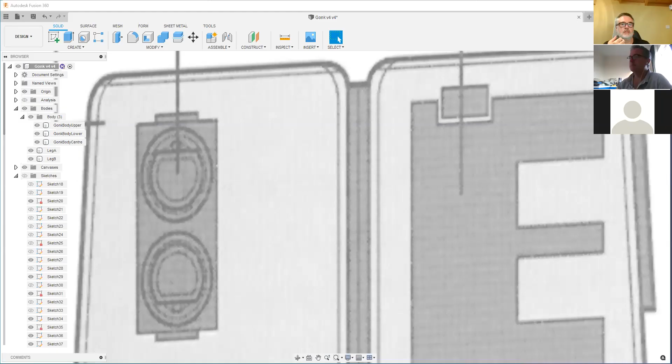Okay. Before we get started, were there any questions from the last couple of sessions, or has anybody had a go at modeling some of this or any other models? So.

Hey, Michael. Yeah. The right side of the Gonk, that area that has all the greeblies and everything. Yeah. I actually modeled that as one piece and just inserted it into the Gonk instead of it being in pieces. I just did one big piece and just slid it in. Okay. Yeah, it worked out okay. I'm just trying to do different things as I learn, but it seemed like it worked out okay.

Is that the piece on the right hand side? This kind of detail here. No, the right hand Gonk, the one facing this one. Yeah, that whole circle area. Yeah. Right. So you just did that as one big insert. Yeah, and then I just slid it in and out. I don't have it up right now. Something's wrong with my Fusion, but it seemed like it worked okay.

Yeah, to be honest, it's probably something I'd do, because it's ideal if it's printed flat, isn't it? You've not got to compromise as much trying to put angles in to get overhangs and whatever. Right. Yeah. And I'm going to put magnets around the outer shell, so I'm going to put some lights and things behind it. So I have it as one piece, and then if I want to get inside of it, I can just pull it out and do whatever. No, perfect. Cool.

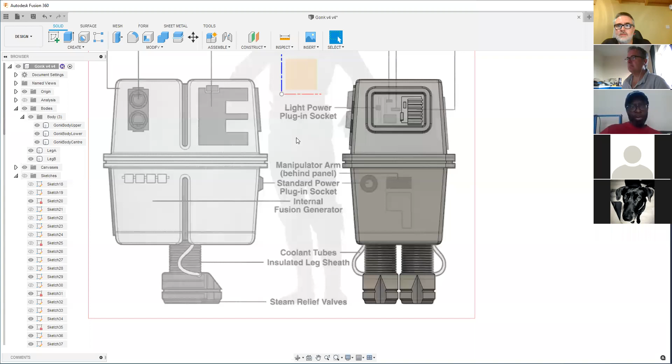Anybody struggle with anything on the modeling so far? Does it all make sense and is it all working? No. No, all good. I'll take that as very positive then, to be honest.

Cool. Okay, so what I have done just in the last half an hour or so is I've added this greeble at the front. I wasn't going to step through how we did that. It was pretty much the same as we've done already, which is using pulls and extrudes, etc. So effectively, again, we talked about sketching on different surfaces. You can sketch on this surface here, you can pull it up so that it lines up, and then you can start to draw some of these different greebles and different shapes, and then really just use either the extrude or the pull to continue to add details.

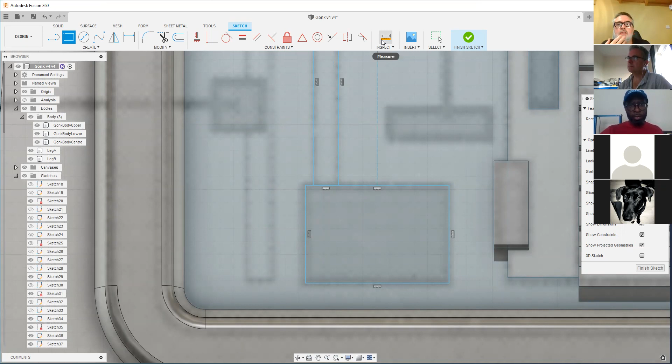I'll just go through some 3D printing stuff, to be honest. One thing to watch is first of all the size of some of the details on here, bearing in mind that depending on the scale that you're printing it on, you're going to be printing on a 0.4 nozzle. So I find the inspect button really useful, because you tend to lose scale anyway when you're zooming in and out; everything looks a lot bigger than it actually is. So you can measure between two lines there. I can see that's 1.93 millimeters, for example. On the 0.4 nozzle, that would be fine. But if you're getting down to 0.1 and 0.2 millimeter details, you will lose them.

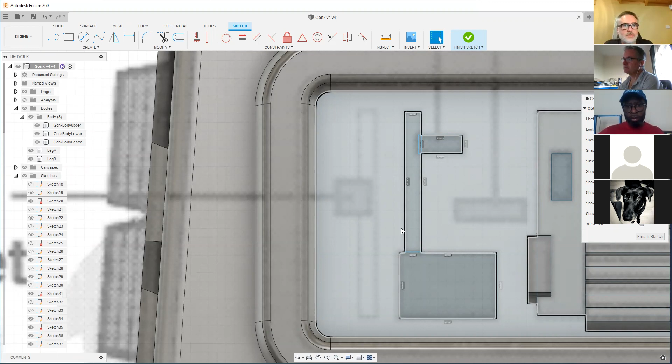I tend to find with things like the body panels on R2, where I'm putting lines in there, I'll go down to probably about 0.6 millimeter to make the details around the panels. I won't go much below 0.6, because otherwise you just lose the detail when you start to print it. And as soon as you start to paint it, it just kind of fills in. So it's really not worth going down to that sort of level.

The other thing that I tend to do, and again, this is more direct modeling, is I just tidy the sketches up. I literally just delete all the sketches, like I've just done there. I'll delete the actual construction planes, just so that all I'm really left with is the bodies, and it just makes life a little bit easier. I've not got a huge list of things on here. Obviously, if you're not doing direct modeling, if you're using the timeline, you can't do that because everything's linked. Whereas with direct modeling, as I said a few times, it's a bit like wood, to be honest. You can just go back and change and cut bits and then rejoin bits.

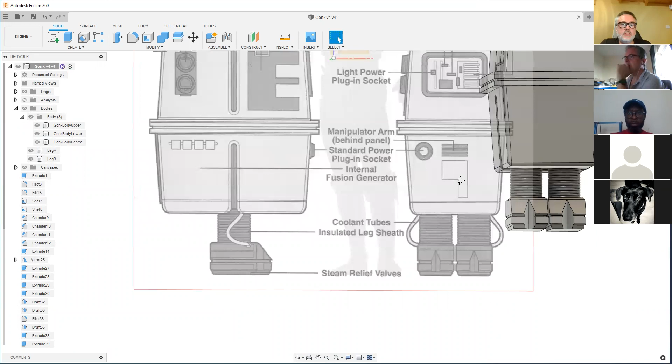Right. So one of the things I was going to cover, I covered this very slightly last week, is how you do these tubes, cables or whatever. So I did a lot of these on Chopper's legs as well. I think I did cover it, but let me just bring my origin back.

So the way that you do these is something called sweep, and sweep again is a really useful tool. If you just go to the front, what sweep requires is 2 sketches along 2 different planes. I'll just show you in simple terms what that does.

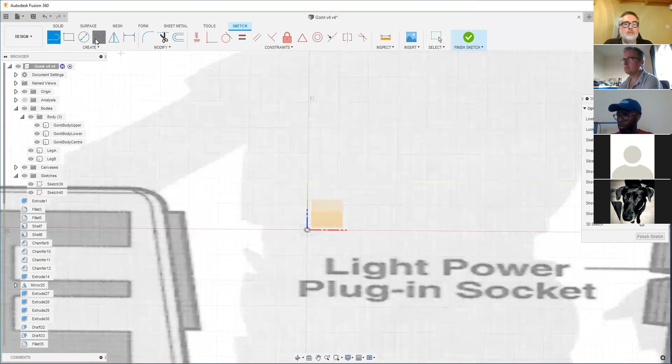So that's the shape of my cable, wire, or whatever I want to sweep. So I finish sketch, and then what I'm going to do is define the path that sketch goes. I'm going to choose a plane that's 90 degrees to that, and use a spline because that gives me a nice smooth curve, and just draw a little bit of a cable like that, and tick.

As we said last time, you can get the cable moving on a spline, but it's still really in 2 dimensions. So if you look at it directly from the side, it's still flat.

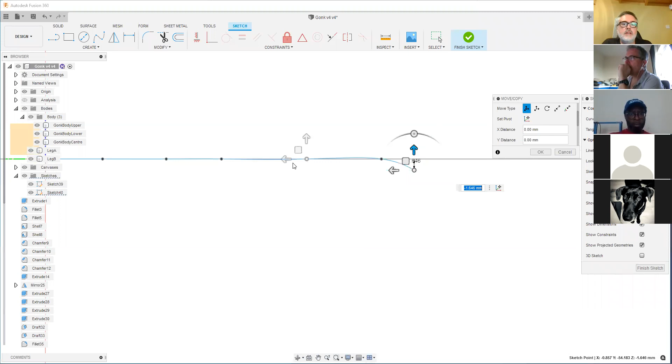Now what you can do then is go in and edit the individual points. I just want to refresh on this here. So I can then look at it on the flat line and pull that down a little bit, click on that and pull that up a little bit, click on that and pull that down a little bit. So what I'm starting to get now is this shape in sort of 3D space.

So if I look at it from the side, that's what it's like. If I look at it from the front now, you can kind of see that it's got this loop thing going on. So you always draw it in 2D flat space, and then you move that. So what I've got now is a profile here, and a path which is going to follow the profile, and the two do need to intersect.

And then finish sketch, and this is where you do the sweep. You highlight that profile, you click on the path, click on there, and what it then does is it will actually do your cable like that. So sweep, I find sweep really useful for doing that.

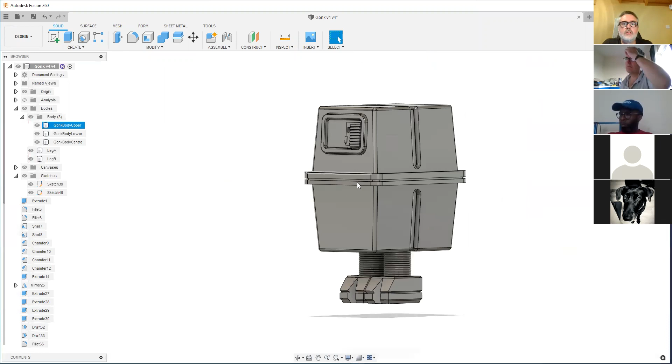The other thing I do use sweep for sometimes is for adding overhangs after I've made a complex body, particularly on curves. I can show you what I mean on here. So if I was printing this straight up, I've got a 90-degree overhang here, which would create a bit of a problem. So what I'll often do is create a mid-plane, say between there and there.

Click OK. Then what I'll do is draw on that mid-plane. It'll all become apparent in a minute. Sketch - and for reference, I'll reference that line and that line, the ones that I want to create a little bit more of an overhang. Rather than being 90 degrees, I might just pull that down, so that's 180 to 160, which is a 20-degree overhang, which is, as I said before, probably the sharpest that I would actually go.

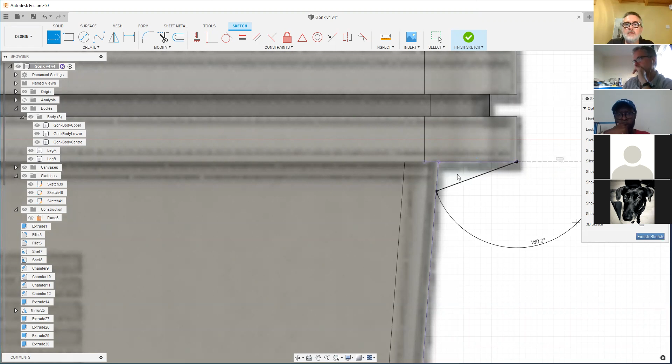So what I've done now is created a profile - let's have a look, so you can see the profile I've created. I want to add that now, so what I can use is create sweep, select that profile, and then the path I can select as being the outside edge. I don't know if you can see it, but it's in red at the moment. What it's now done is added that all the way around the outside of that edge.

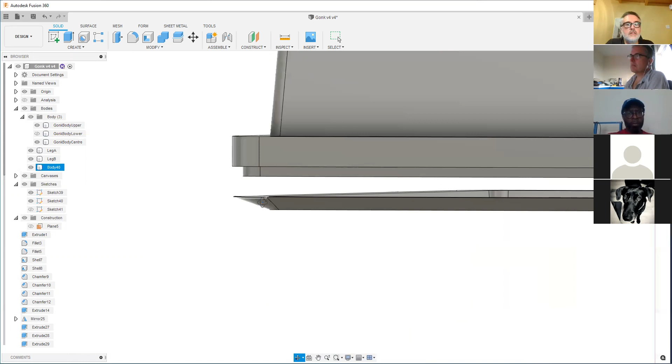So very quickly, if I click on join, what that's done now is given me a continuous loop. In fact, I've selected new body and I'll show you - if I hide that lower, it's created the overhang for me based on that profile. So again, really quite useful for when you're designing and thinking about overhangs - you can use a sweep to wrap around, and then all you've got to do is modify, combine the main body with that, and it becomes part of the plastic.

So when you're then printing, if I was printing this straight up, what I'd have is that overhang built into it. So again, I think as you start to go through all the different tools, it's just playing with them and looking at what you can use them for and when it's appropriate.

So I'll just undo that to get back to... oh, look at you.

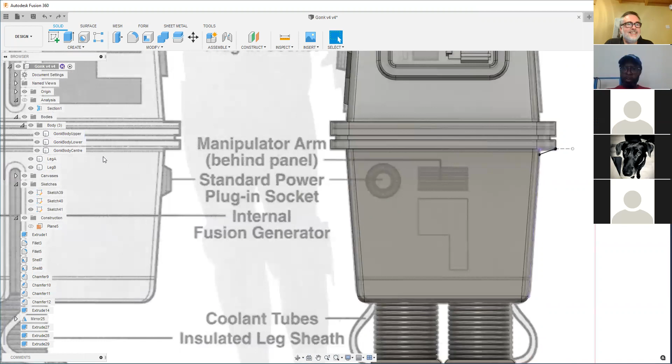So after being like, oh, I'm available both days, now they're like, okay good, what about tomorrow? Hang on a sec, I think. So, fold these up, I'm just gonna... oh, there we go, sorry.

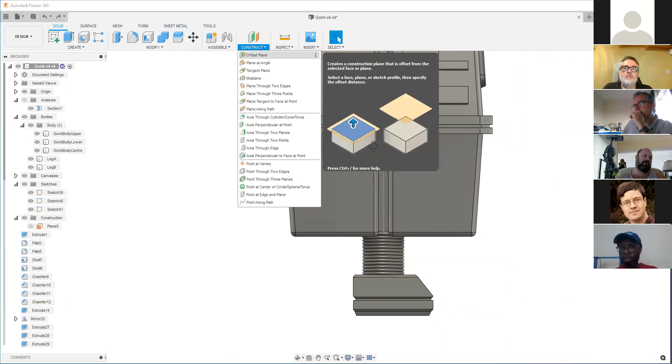Actually, what we'll do first of all, as I said, when you first create planes they're not always as long as you want, so you can grab hold of any of the edges and pull them out.

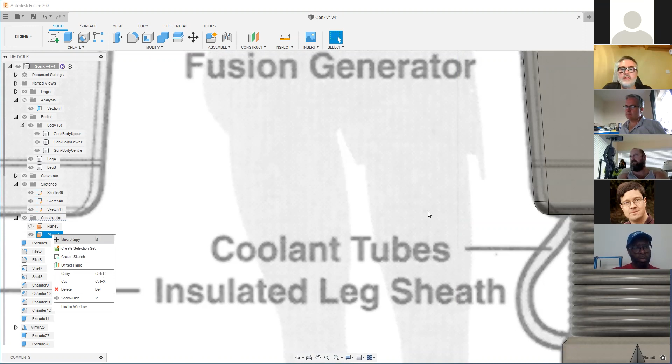But I want to, if you look at it from the front, I want to start sketching about there. So what I'm going to do now is that plane I've just created, right click on that and click on move. I can now shift that plane in again to exactly where I want it to be. So I'll pop it into about there, like that. And then that lets me sketch that first part of that pipe in the right place.

So I'm going to go into sketch mode on that. Now I'm on that plane again, and I'll use Spline, and just see if I can roughly get where I want. Something like that.

And the other thing with Spline is, I think I mentioned this last time, you don't have to get it right first time, because once you've done your spline, you can go in and start to drag some of the points around.

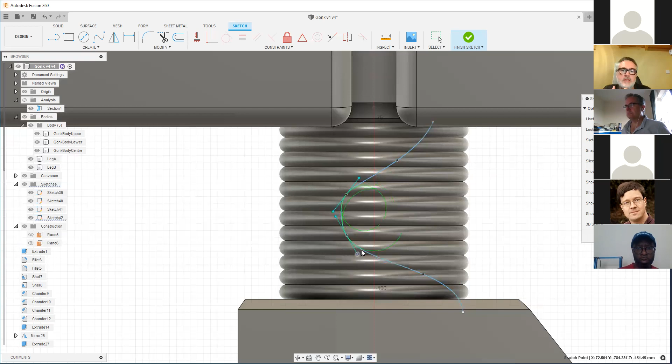So I can reduce that little bit of that kink on there if I wanted to. If I click on any of the points, I can adjust the acceleration of the actual curve, so I can get it just around about where I want it to be. Just pull that out a little bit like that, there we go. So yeah, I'm happy with that.

And then again, if I look at it from the front, I can see that I'm going to drag, let's move these points yet again. So... whoops, what's happened there? I've obviously dragged that right down to there. So let me just undo, get back to how we were.

Right, so what I'm going to do now is right click, move, and I'm just going to move these points. When you first start moving these points it looks like it's going to make a right mess, but if you just pull them across, there we go, start to get it to follow that pipe there.

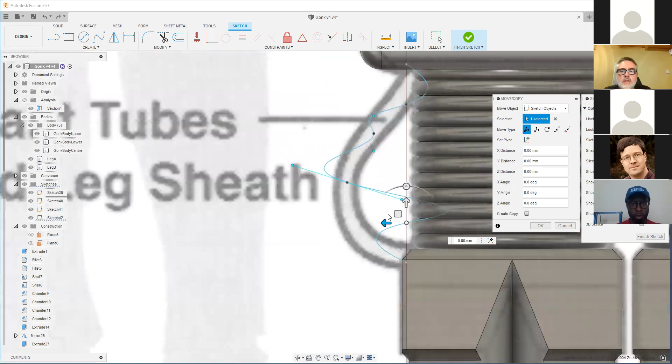Why is that doing that now? It didn't exactly go to plan. Let me try again. Move. So let's...

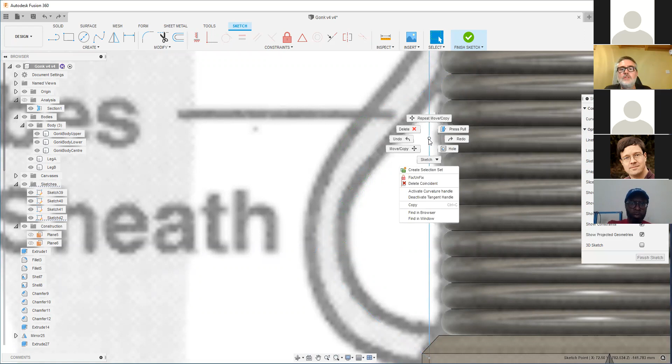Drag these points out to there. Drag that point out to there. Get that point out to there. Might just... okay, and then drag that point out to there. Escape. Oh, don't hit escape, I hit escape then. Sorry about that, I'm just going again. There. There. And there.

Okay, and then what I'll do is I'll just grab these, just smooth out the angles a little bit then.

Move that one to the... move that to the. There we go, that will do. Okay.

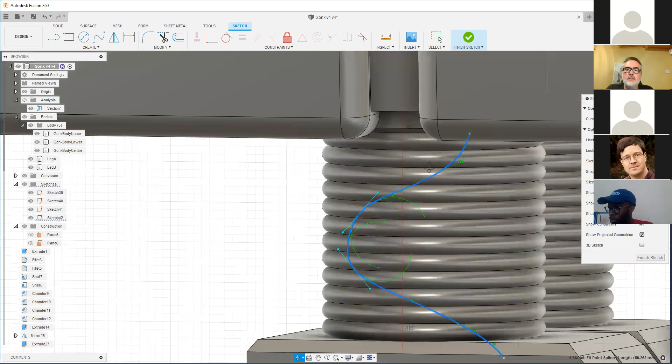So what I've got now is a path that's following it from that side, and then I've also got the same angle, so it's roughly the sort of size and pipe that I want. And then if I look from the bottom, what I'll do is I'll just sketch the profile of the pipe on that starting point there.

So the profile is just going to be a circle, I'll make it about that big. Finish sketch, and... oops, I missed that. I'll just right click on that and move it so I can move it back to, so it's got to intersect where that sweep is.

Okay, highlight that, and then I'll do a create sweep and select that as a pathway, and put that as a new body. And then what I've done there is I've actually created the pipe that's roughly the same as the one that you can see on there.

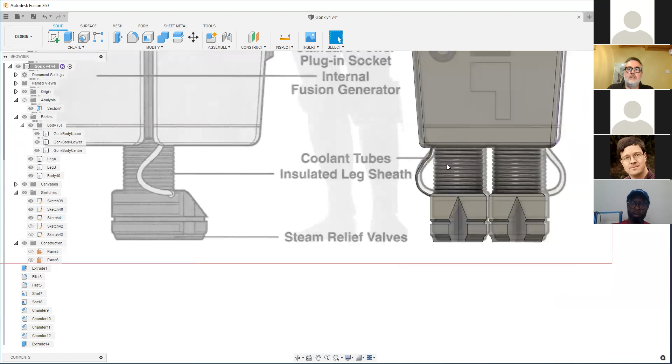Now, as you can see, it's considerably thinner than I want it to be. I'll just see if I can press and pull this one to make it a little bit thicker. No, it won't let me pull that.

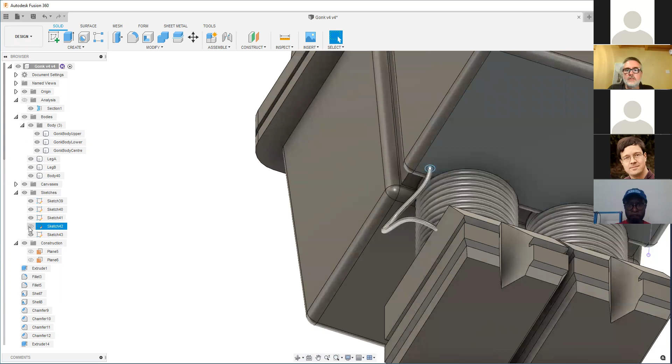So let's try and make a slightly bigger circle. But hopefully you kind of see. And all I'm going to do is delete that body, delete that center circle, and then I'm just going to recreate it really.

So create sweep, and select that as a pathway. There we go, and a new body. Make it a little bit thicker. There we go.

So that's your pipe, and then obviously you just repeat that on the other side. Delete my sketches as we tidy up, and effectively that goes in. I think we'll mention, like last time as well, that this is about 1.7, 2 millimeters thick, so you could actually just use filament for this one and drill a couple of holes in there. So both kind of works.

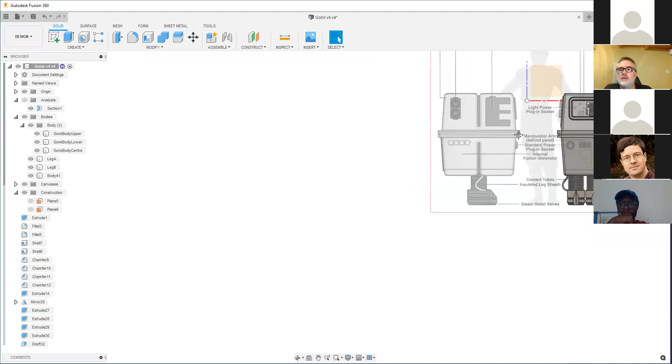But yeah, so that's the sweep command. And then, to be honest, the rest of the details on the Gonk is just a matter of continuing to model - drawing the squares, drawing the circles, pulling, extruding. And it's more about being creative in the way, like we did last time, about actually getting everything ready for printing, making sure you've got overhangs that will print, etc., etc. So again, I will just stop there.

Any questions, thoughts, observations, or anything you'd want me to go over? Are we all okay so far? Yeah, one, Michael - yeah, go for it.

Yeah, so kind of what you were just coming up there was something I had run into a few times now, where you've got a body and you wish it was a little bit larger or in a different position. And in general, I've had to kind of start over instead of being able to adjust the profile or slide it. And kind of the same with holes - like I've placed holes, but then decided I want to, or a body to extrude part of it, and then I want to move that later. Is there a way to do that once the bodies are created and you've lost the sketches and stuff?

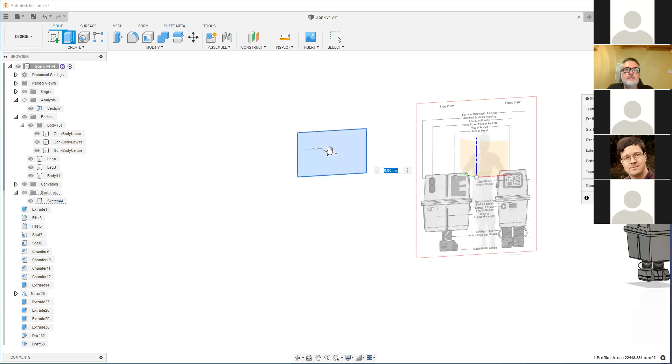There is, yeah. So I'll just do something quickly - I'll just model a block to play with. Yeah, so start with holes. So if I was to create a hole in here, which is that big, right the way through there - so I'm just going to cut a hole.

So the first thing with holes is holes can be moved around in the same way as bodies can be moved. So if you right click on a hole, once you've got it selected, you can actually move that hole around. So you can shift the hole to wherever you need to.

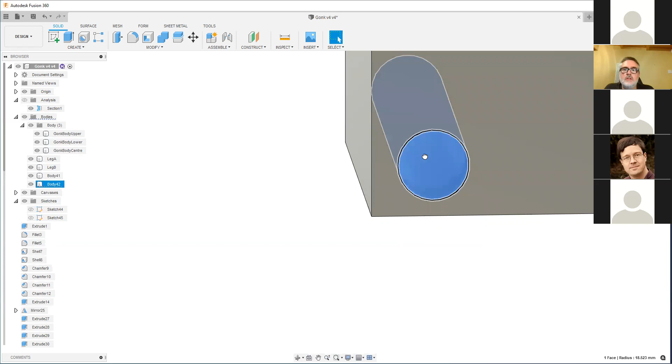If you want the hole to be smaller and larger, you can press pull to reduce the size of the hole or to increase the size of the hole. And likewise, I tend to use things like press pull all the time, really just to adjust the size and various dimensions on it.

Now, it works very well when you're just doing it with squares, but then when you start to introduce more complex models, like you've got fillets on there and things like that, it can operate slightly differently. So this is working okay. If I try and press and pull the fillet, you can see what happens then is it does the best that it can do to adjust the model that you're actually wanting to, in whichever direction you want to do it.

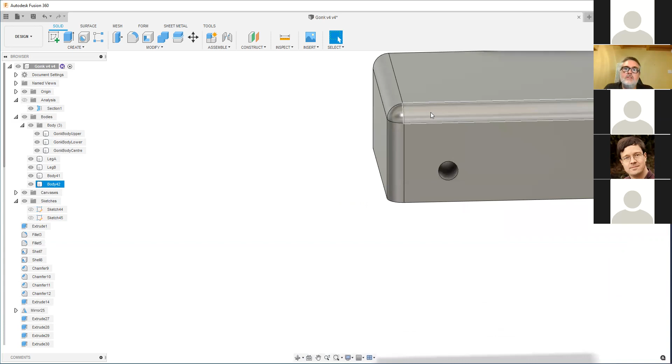But the more complex the model, the more things start to be interlinked, even in direct mode. So like I said, if I'm trying to alter that curve, you can see it alters all of them. But most things can be moved around. You can see I've just put a fillet on that, so what it's done is it's done the rounded bit on that corner. So the more you add to the model, the less flexibility you've got when you start to pull. But generally, you can push and pull most parts around.

Have you got any specifics that you wanted to? I don't know if what I've just gone through there was useful, or whether you'd hit other challenges that you couldn't do things with.

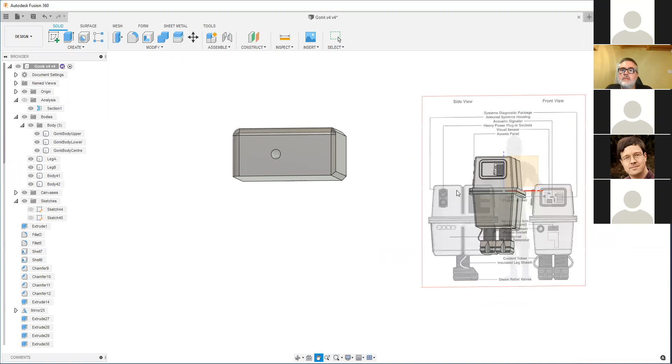It's definitely helpful on the holes. I guess if you want to go back to the Gonk for a second, I could see if I have a better example. So like if we look at the body that you've got there for the greeblies on the tray, if that's already, is any of that recessed? I guess like if there was a piece that was recessed and you wanted to move that, but you had already extruded it into the other body, I guess. So something other than a hole.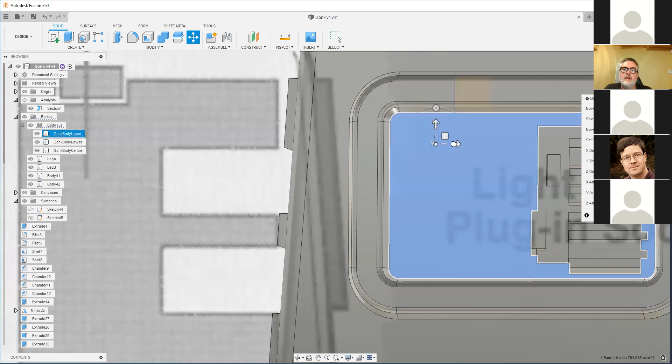So yeah, if you pull in, you can pull it in and out. Do you mean actually physically move the recess? Yes. Right, so if I hit move on there, that's where it won't let me move the recess. Is that what you mean?

Yeah, so in that case, a couple of things you can do is you can press the shift key and select more elements around. Because what it's trying to do is move just that back plate with it, but it realizes that it's got all of the recess planes and the fillet planes and all of that kind of stuff. So sometimes if you press shift key and select more of it like that, and try moving, it can do it. Let's try to see what happens. Yeah, so there you go. Okay, cool, thank you. Yeah, so that's one thing.

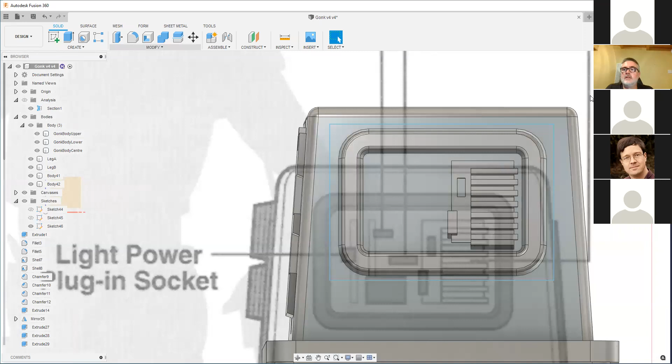What the other thing that I'll do sometimes is if it won't move at all, I'll literally drop a square around it, do a modify split body, cut that out, and then just move that whole piece to where I want it to be. So I can pull that down to there, for example. And then what I'll do is just pull that top bit so it just overlaps again. And if I hide that piece I've just cut out, I can then pull that bottom piece. It's a bit of a workaround, to be honest, but you can do something like that and then modify and combine them back again. So in that case, you're kind of sliding it around, making holes and then filling them and matching things back up.

Yeah, so okay, all that if you've got something with a load of complexity and detail, all you've got to watch out for is that on the inside you've got enough room to play with it, so you don't end up hitting a corner or something like that. But I'll just step through that again.

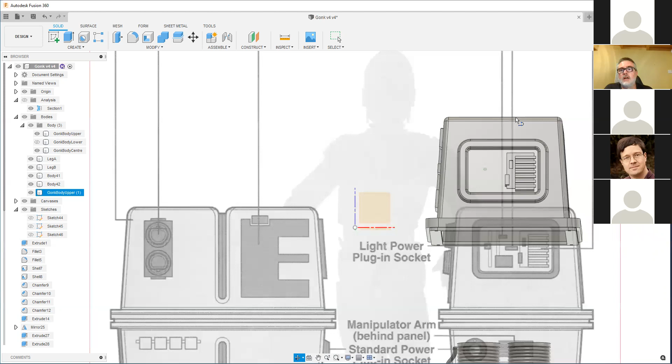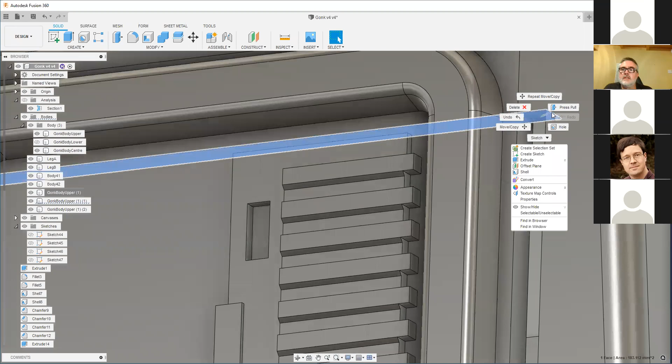So what I did is I went into sketch mode on that plane that it's on. I drew a square around it, so it's fairly close all the way around like that. And I'm using that square to cut out the piece I want to move. So modify split body, highlight that middle section like that, click OK. And now that's obviously a cut out separate piece. And then I can move that wherever I want to move it. So I can move it up a little bit and across a little bit like that. And then when I've done it, all I'm doing is using the pull command on these inner faces here, which is the old hole, just so that everything connects back up again. That makes sense.

Just pull. So it just saves you having to sort of recreate the whole thing again, and then modify and combine this and this again. Is that helpful? Yeah, thank you very much. Cool.

Good. And hey, Michael, a couple of quick questions. Yep. So your primary use of planes is to be able to sketch in space. Is that how I'm understanding it? Yes. Yeah. You can use planes. Well, you can actually use them for quite a few different other things, but that's what I've been using them for so far. Yeah. Okay.

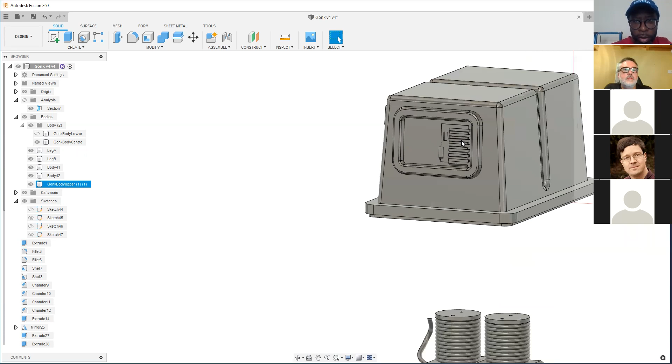And the second one is for when you had the 90-degree overhang on that edge, when you fixed it, is that going to be a part of the print? That could be removed later, or is it going to be permanent? The one that I did underneath here. Yeah. Is that going to be a permanent part of the print, or something that's removable? It's permanent. If you do a body combine, it's a permanent part of the print. So if I do modify combine, it's taking that piece that I had around there and combining it with this body to make it actually part of that whole body. Okay. So it is a permanent part.

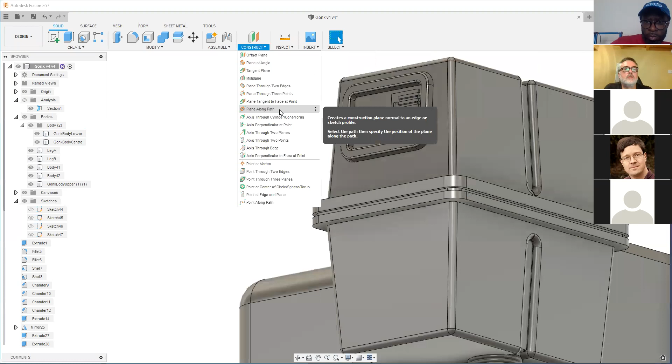Are the little triangle supports on R2 an object that you created in Fusion and then duplicated around, or is that a feature of Fusion somewhere? The ones you can snip off. Effectively I've created those. So again, I'll just quickly show you. So if I do mid plane, I'm just getting a mid plane to give me something to sketch onto. I'll show you how we did those.

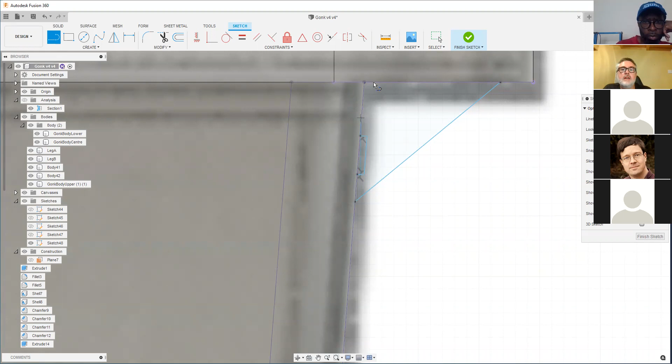So you pull that like that, and then I'm into sketch mode onto there now. So we're just going to project. Project, there we go. I'll just project that and that. So they were the little plates that went something like this, and then I did a couple of little cutouts so they weren't stuck directly to the plastic, so they've got a bit of a latch, and then I put a little bit of a gap at the top. I think it was 0.4 mil at the top, which was a gap for it, and then that gives me one.

So I might make that 0.8 mil wide. It's a new body. So I've modeled something like this. And then what I would use is create pattern. I'm going to create a rectangular pattern, and I'm going to use the very edge there as the guide. So as you can see, that's moving. If I wanted to click it onto symmetry, I'll move it to there. And then I can choose how many of those I want, 4, 5, 6, 7, 8, 9, like that. That's awesome. Thank you.

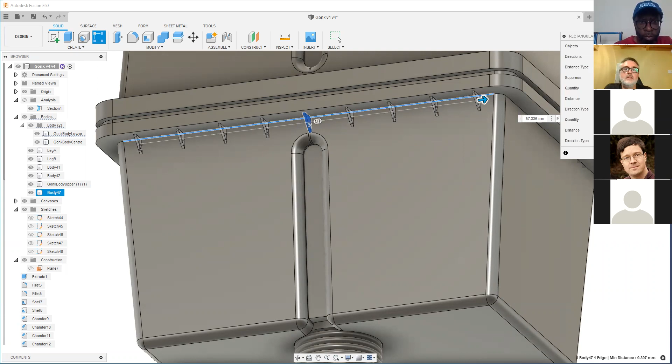Andrew, does this help with what I feel like your question was getting at too? Yeah, exactly. That's what I was trying to figure out, because I want it to be removable where I can still have the 90 degree, but just for printing purposes, have it there. Got it. That's good. Thank you.

And tolerance is, if you use a slicer to generate supports, it will create an empty gap between the layer and the support, but that empty gap is dependent on the layer height that you're printing on. So if you're printing at 0.2, it'll typically create a 0.4 gap. But if you're printing at 0.3, it might give you 0.6. So it's got a couple of layers where you're not printing, which gives the plastic enough time to cool, so it's not going to stick to the next layer.

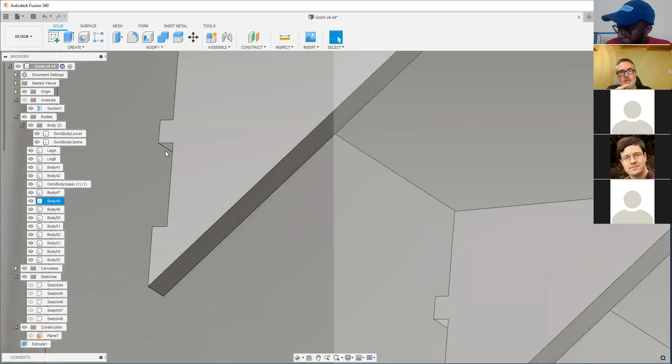So if you're doing these, what I tend to do is use a 0.4 gap. With built-in supports, I'll tend to use a 0.2 layer height as a start, and do a 0.4 gap. It's a little bit of trial and error, but when you're doing these little tabs that are sticking into the body, you want them to be big enough to hold, but small enough so that you can cut them out with little clippers. So you can play around with those a little bit.

So the widths are closer to allow for better bridging. Is that right? Especially when you're coming across. Yes. Yeah, gotcha. Okay. Yeah, you want your width to try and give that.

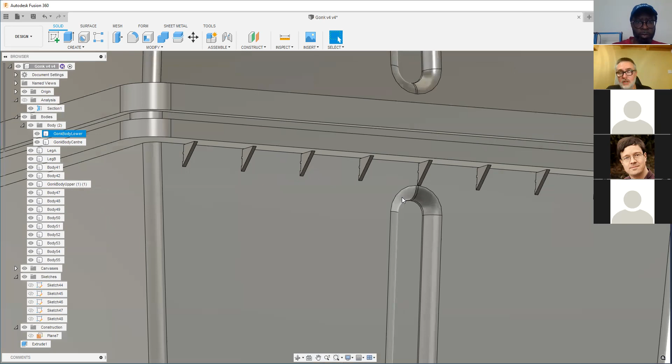The closer you are, the less you're going to get sags in between each one. Right, thanks. And a lot of it's trial and error to see what works on the particular model that you're printing. But as we've seen on some of the R2 ones, these are quite easy to cut off with a pair of those little side snippers anyway. Right, thank you.

So yeah, the pattern command is really quite useful. The other one you can use is pattern on a path. Whereas before we just did it in a rectangular shape, if you click pattern on a path, it'll allow you to do a bit more of a complex path. So as you can see there, there we go. This one's now allowing me to go around the corner as well.

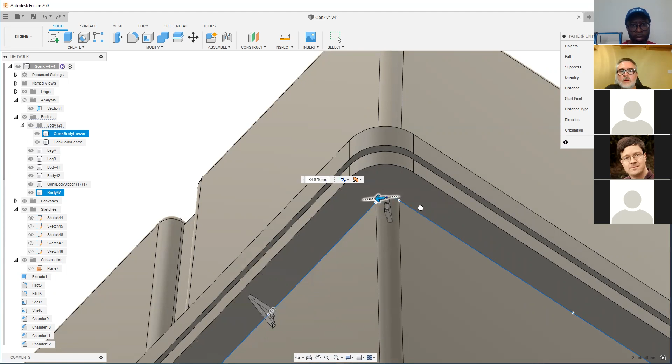With those patterns, if you modify the original object, will it update the rest of them? Not in direct model, no, it won't. Okay, so you mean if I was to put those supports in like that, click OK, and then pull this face out? No, I mean if, let's say, you wanted the triangle to be slightly taller, could you update one of them and it would replicate the rest within that pattern? Or if you put a hole in the middle, does it copy it to the others, or are those each their own item now?

Yeah, you can see as I'm pulling one, the other two are pulling. Can you see that? I think I'm getting lag, but I believe you. Oh, there it is. Okay, cool. Yeah, when you mirror an object or you create a pattern of an object, it tends to link the objects.

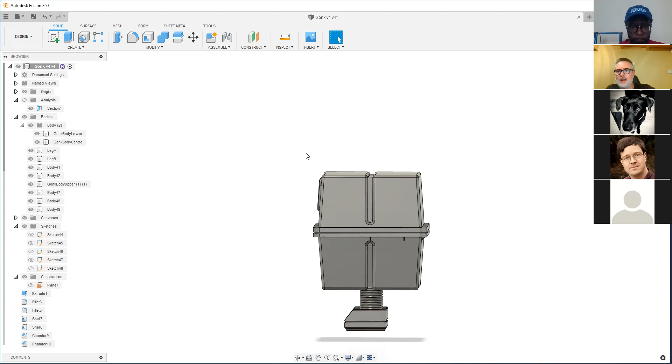I've been caught out with that, to be honest. On R2's booster covers, the details at the side, I've pulled one side back by 37 mil for the long and short legs, and then gone to the mirrored one and pulled that back 37 mil. What I've actually done is pulled it back 74 millimeters, because if you do it on one mirror, it actually affects the other one. Does that make sense? Yeah, absolutely, that answers the question for sure.

Thank you. So you've just got to keep an eye on the models as you're making changes, particularly where you've got patterns or mirrors, because it can affect more than one. The other thing to watch is making sure that you combine all the pieces you want to combine before you export your STL. At the moment, the body's not got those supports combined to it, so I'd have to use modify, combine to connect them together. So I'll just delete those.

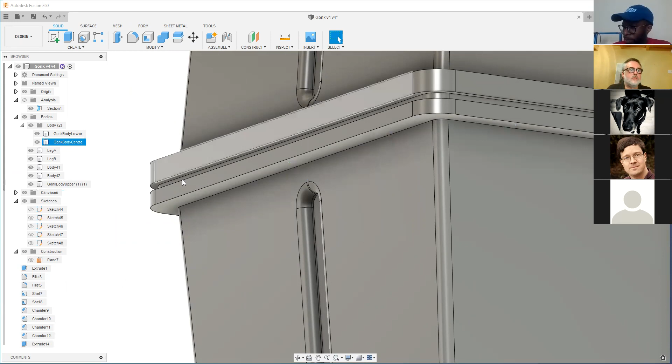I'm not going to go through modeling all of these because we're using a lot of similar ones. Once you've got the body ready, right click and save as mesh, which exports it ready for STLs. I don't know if I mentioned this last time, but in the last update Fusion 360 made the default format 3MF, which is a more sophisticated mesh model, and a lot of slicers will happily load a 3MF as much as an STL. But for maximum compatibility, you need to drop down and reselect STL. It's just a gotcha to watch out for.

I was having a read through, and 3MF has a few extra features. It holds the scale a little better than STL. STL is quite an old-fashioned one, but it works for what we do. You've also got refinement, so high, medium, and low on STLs. When you're exporting for print, that's the number of polygons, or triangles, that's actually on that model.

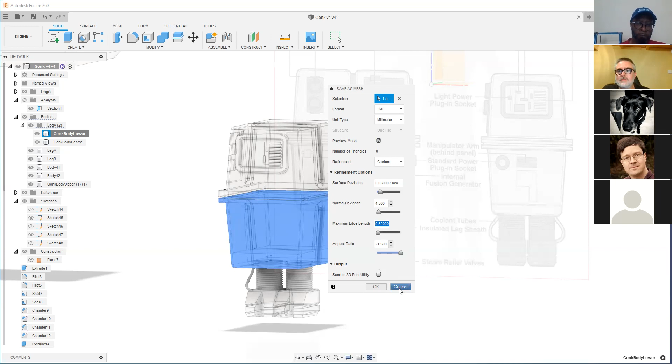And of course, then people were struggling a little bit when they loaded them into slicers, so they'd end up just toning that down a little bit. But you've got quite a bit of control on there to play with it. And then I think we covered this last time as well, but obviously you've got the file save, which saves to the cloud. So Fusion is a cloud-based system, but you've also got the export, and export lets you save all of these files to a local file in the .f3d format, which is Fusion format. So if you don't necessarily trust the cloud, or you're worried about losing files, you can also save these things locally.

Okay, and that was pretty much it, I think, to cover on the Gonk. Anything you want me to cover specifically, or anything that you want to dig into?

More questions? Hey, Michael, one more for you, and then I think I'm okay. Yeah, go for it. In the beginning, you mentioned the detail on the greeblies. You said if you had fine lines, you would use like a 0.6 millimeter for detail. Is that something that you set in Fusion? Where would you do that? How would you work that out?

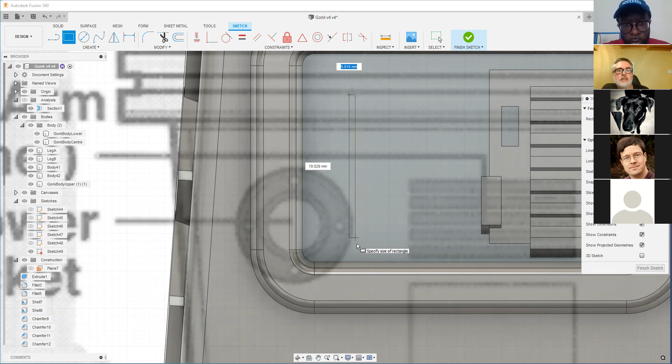No, what I was referring to is if I was to create a line, sort of like a thin line that detailed the panel. So if I put 0.6 on there, you can see that's 0.6 millimeters wide, that block that I've created. And then if I click on finish on that, and then I right click, press pull, minus 0.6. So what I've created there is a little groove that is 0.6 deep.

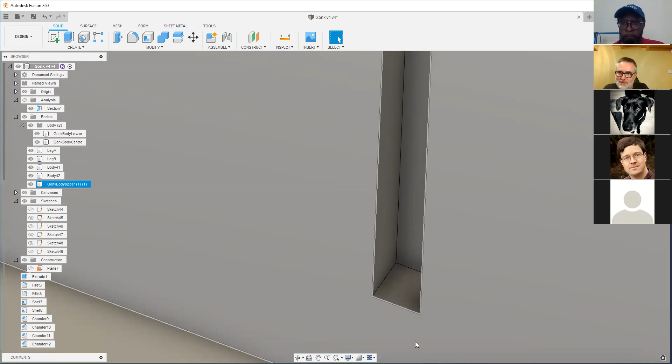And 0.6 wide. What I was kind of saying is that I wouldn't go much below 0.6, because what you've got to imagine is that your nozzle is 0.4 millimeters. So it's quite a big lumpy crayon thing that's drawing this almost. So what you want to do is not go dropping into 0.1 millimeters, because you just won't see it with the nozzles that you're actually printing on. And even in resin printers, you won't really see that. So it's just making sure that you exaggerate the detail enough.

Got it. Yeah, I missed that. Thanks. The panels in R2 are 1.54, about 1.5 millimeters wide and 1.5 millimeters deep. The grooves for the panels are huge things, particularly when you first model them. I thought, oh my God, this thing's going to look ridiculous, but of course it looks fine from a distance. And I tend to use that 1.54 again as a standard kind of tolerance for doing panels on full size ones, because that's what R2 uses.

The other thing quickly to cover, unless anybody's got any questions, just fire them out. The one thing real quick with that recess, that's like a really simple example of what I was asking earlier. So that one you just made, if you wanted to slide that to the right or rotate it 90 degrees, is that something? Yeah, I can show real quick.

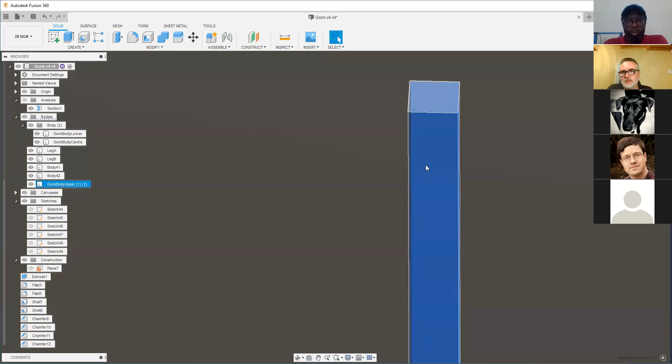So again, whatever you highlight is what it's going to try and move. So if you're going to try and move a whole recess, your best thing is to hit the Shift key and select all the facets that are in that recess. Got it. Cool. Thank you. Yeah, and then right click and do Move, and then you've got more chance.

Now, the other important thing, something that I use all the time, is this thing here called Set Pivot. By default, it's put the pivot in that corner there. If I click on Set Pivot, I can now drop that pivot anywhere. So if I'm moving something here, I might want the pivot to be roughly in the middle. So I can pop it there. It'll shift that pivot point to there, and when I've finished, I click that little tick box.

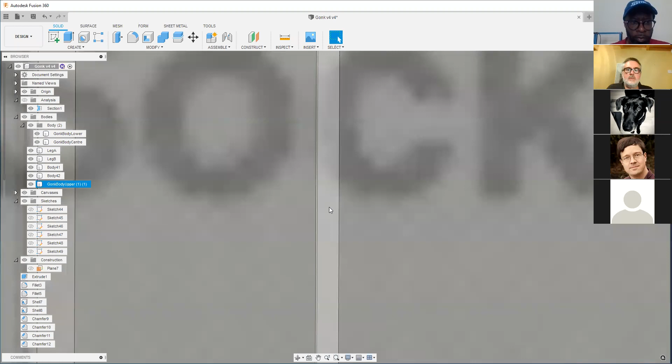So now the pivot, the place where I'm grabbing these little arrows, is in an easier place. So now I can drag it left and right, up and down. I can rotate it. But the reason I can do that is because I've selected all the different facets on that object. If I just selected the back without selecting the outer ones, it won't let me do it, because it's saying you want to move the back, but you actually want to keep all of these bits that are cut around it in the same place. So I don't know what to do, so I'm just going to leave it there.

Does that make sense? Yes. Yeah, thank you. It kind of tries to keep it as a closed object then. Yeah. So Fusion is really quite clever. But if you want to move this whole thing here, you could actually just go around, press the Shift key and select absolutely everything in there, and it would let you move it.

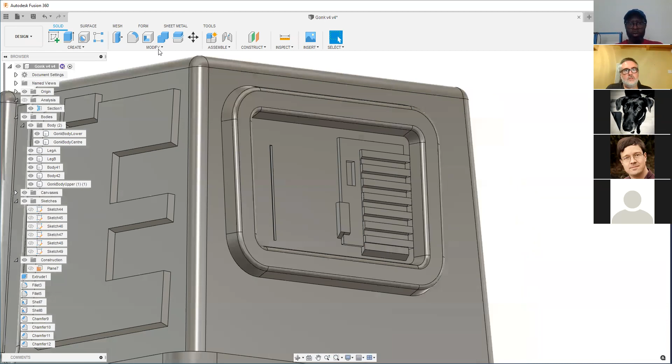The other thing that I tend to do is just use Split Body and use that back plate as the splitting tool, which then effectively creates this piece here as a separate object. Similar to what I did before, where I just cut stuff out. And that's why I quite like using direct modeling, because I could just cut stuff, move stuff around, and then just use Combine again to put it back together. Yeah, that's really great, very helpful. Yeah, that's cool.

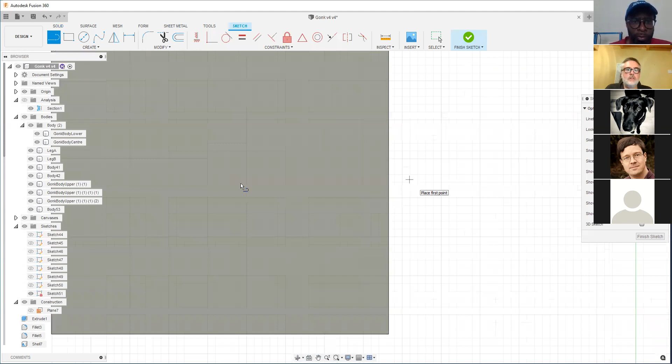The other question that I get asked a lot is how you cut objects for joining, particularly if you've got a smaller printer. Yeah, definitely. So I'll show you on a really simple one, but I quite like dovetails, to be fair, because they're quite a neat way of doing it. So what I'll tend to do is draw a line to cut it where I think is appropriate, and then just draw a line out.

And again, I use the mirror quite a bit just to save me having to get everything perfect. So I'm just going to mirror that line. I'll just delete that middle one. So that's effectively now giving me a sketch for the dovetail. So if I do Modify, Split Body,

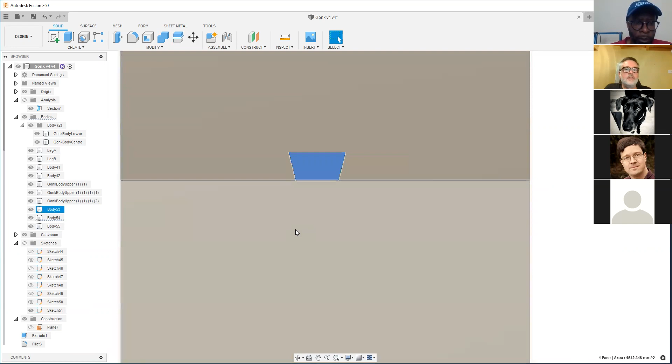I'll cut it in half first of all, bring the sketch back, Modify, Split Body, this top bit, and I'll then select the two parts of the dovetail. Okay, so now I've hidden the sketch. I've now got three pieces, this piece, this piece, and this piece. So what I can do is Modify, Combine this with the inner part of the dovetail.

And what I've effectively done is split this into two parts with a little dovetail that connects the two. Now if I print this, you wouldn't have a hope in hell's chance of actually getting that dovetail to fit together, because the tolerances would be too much.

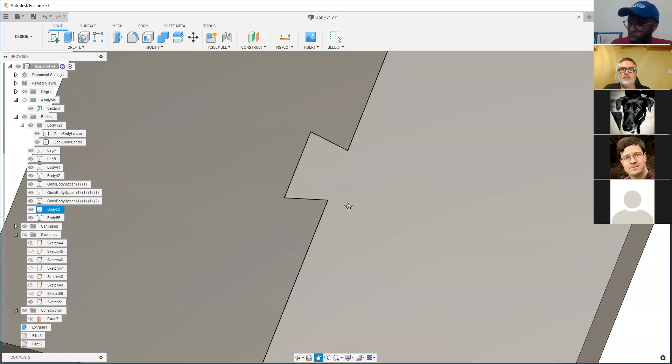So what I then do is hide one side of it, highlight all the faces on that, and then just use a press pull command to do minus 0.25. About a quarter of a millimeter gap gives you a fairly tight fit, but it will actually fit.

So you can see now there's a 0.25 mil gap between this piece and this piece, which means that dovetail will go in. If that's a bit too tight, you can pull it back another minus 0.05, which gives you a 0.3 millimeter gap, which is fairly comfortable. 0.25 to 0.35 is what most people use for something where they want a good solid tolerance where it's going to fit together.

If you go 0.5 to 0.7, that's where you've got parts that will move. If you're trying to create something where you want it to actually move or slide, 0.5 mil to 0.7 mil will give you enough space. And for things like wheels and bearings and tolerances, I tend to use a 1 millimeter gap. So it's just a matter of playing around with the tolerances.

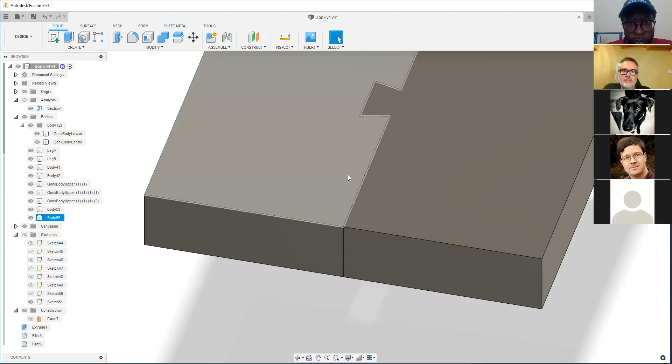So at 0.25, you should be able to get a really nice friction fit. And then you use something like Plastruct, and it'll go right into the cavity and just weld it all tight together. Yeah, exactly. So 0.25 is kind of the default one that I use.

That is very helpful, because right now I have a smaller printer.

Now it does rely on you having access to the Fusion files or the step files. So there's the files that we're using here, obviously the Fusion ones, and they create the object. So these are not a mesh. I'll show you the difference actually.

If I insert a mesh, I'll just grab one of these off the lid. There we go. So what I've done here is I've pulled in an STL file. What I've got here is a solid body, so it's part of Fusion. The step or STP files tend to be this format. So if you've got access to an STP file, it will come in like that.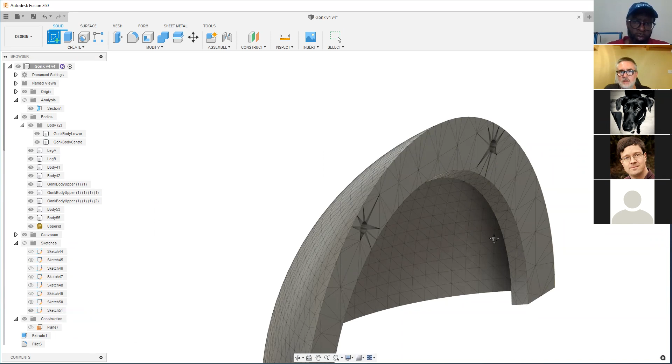If you pull in a mesh file, so you pull in an STL, it doesn't know the shape of that object at all. All it knows is each individual triangle. So with an STL file, you can't draw on any of these faces. If I click on the sketch, it won't let me select any of these faces. So a mesh file has very limited things you can actually do with it.

You actually need access to the original Fusion files. So is it similar to like an STL file and a G-code file, you know, the relation? If that makes any sense.

Yeah, sort of. The step file or the Fusion files are the parent, if you like, the original reference. And whenever you export to an STL file, the software creates all these little triangles in the same way as if you take your STL file, it creates the G-code. But with the mesh, with the STL file, there's very little you can do to edit this.

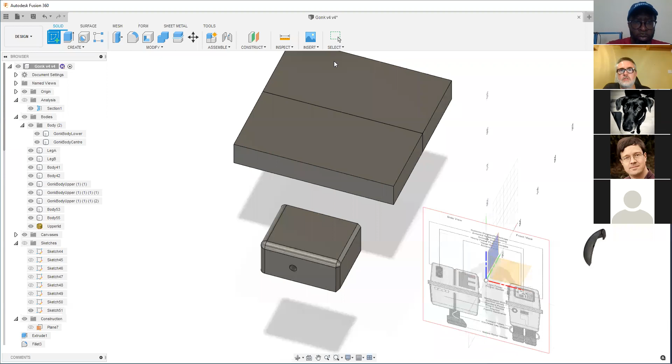It's not easy to edit these things. So what you really want is access to the original Fusion files or a step file, which is kind of why I tend to throw all the Fusion files up for sharing as well, so people can do their own custom cuts. Because otherwise, it's a lot harder to do it with mesh.

Gotcha, thank you. Yeah, so that's dovetails. Let's come out to sketch. The other method I've been using quite a lot recently is using little 10mm by 3mm grub screws or set screws for joins. So I'll just quickly show.

That's 11mm. So what I do is actually make a hole. So we've got 2mm. I've actually got a few of these set up, but I'll just show you roughly. Great, rectangular pattern.

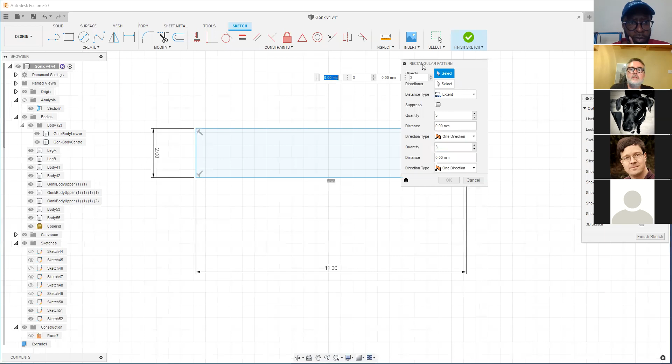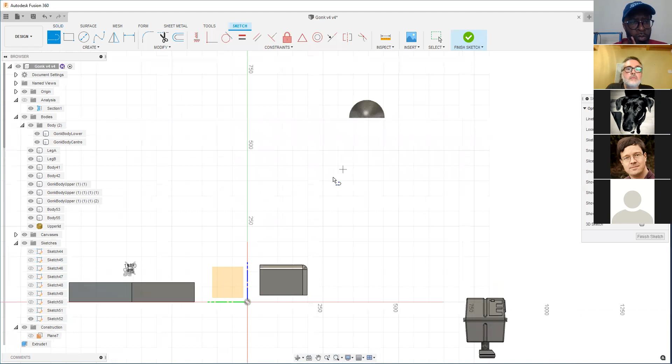So I was trying to find a way to do an edge-to-edge glue or an edge-to-edge fixing that would be fairly solid. That's where I thought actually the little grub screws or set screws are readily available, and I could use those to glue an edge to edge. Lost my sketch now. Where's that sketch gone? There we go. So I'm trying to do two things, trying to talk and design at the same time.

Never a good thing. All right, let me do finish sketch, create revolve. So what will become apparent when I've done this? One of the, as we know, there's no perfect plastic.

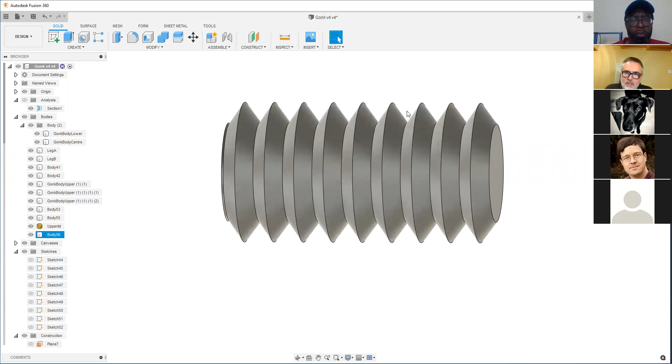I like PETG, it's great, but what PETG does is it's really difficult to glue. So I came up with the idea of using little grub screws, 10mm long by 3mm in diameter, and then using 2-part epoxy to glue them into a hole which also has ridges on the inside. What that means is the glue acts like a mastic, filling all the gaps in between, and it wraps itself around the thread of the grub screw and pushes into these little holes. So it actually creates a physical fix as much as a glue fix.

So I've got one of these models that I just use to make holes now. Rather than using things like dovetails on an edge-to-edge fix, what I can do is pop these in. I'll show you what we do. So what I tend to do is pop them into the body, just embed them 6mm either side, and then use them to create a hole in the actual model.

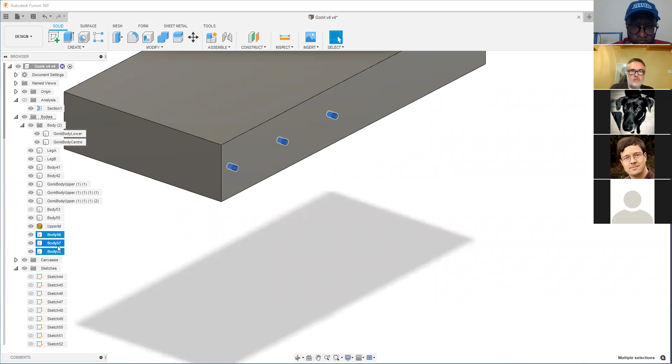So again, create pattern, rectangular pattern. Let's just highlight the direction on there and then move that along. So I'll create sort of 3 of them. And then modify, combine, and what I'm doing is combining these together but using cut. So what that's done now is it's created the little holes in there which the grub screws will fit in perfectly. And then what I do is repeat it on the other side as well. So modify, combine, 1, 2, 3.

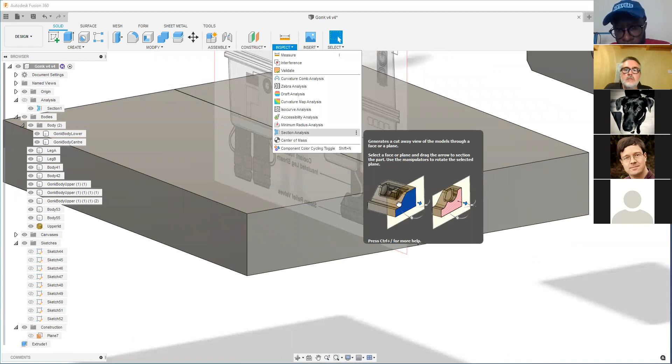So what that will give me, if I just inspect - point through, I don't know if you can see that - but it gives me, this is just a sectional analysis, a hole with little ridges on the inside. So when you put a grub screw in there with some 2-part epoxy, the epoxy actually goes into all of those ridges on the inside and will go into the ridges on the grub screw. So it creates a physical glue as much as just a glue that's holding it together. That's another kind of joint technique that I use on quite a lot of the models.

But when you're trying to get a nice edge-to-edge fixing, if that makes sense.

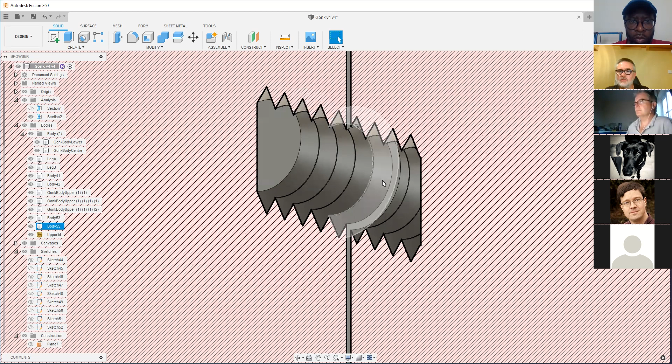Michael, just on that one - so you screw into one side of it and then the other side is a push fit? No, right, the holes are big enough so it just pushes into both. So we're using a 3mm diameter in about a 3.3mm hole. So right, okay, so it's literally just a peg almost. Yeah, I mix 2-part epoxy glue, and then what I tend to do is dip the grub screw in the epoxy and push the epoxy into the hole, and then do the same on the other side. So what happens is the epoxy then fills that hole on the inside and wraps around the thread as well, so it's really embedded into the ridges. Got you, okay, understood, thank you.

Yeah, and there's all sorts of different creative ways you can do that. You could make one side smaller than the other side, to be honest, and then what you could do is screw one side of the grub screw in and then use glue on the other side. So there's all different ways you could do that, but it's different ways of experimenting.

I saw on YouTube there's one gentleman putting together a chopper. He's got like seven different parts and he's showing it in very detailed. He said sometimes it's because of the printer differences - some of the holes will be much larger than others. So he's got his Allen key there, and he'll screw some of them in, and some are a little bit larger, but he said it makes an excellent mechanical fit and it works really well. He's using new patterns - I forget his name, Andrew I think it is. Yeah, so it does do a really good mechanical fit.

One of the challenges with designing is the tolerances of everybody's printers, because the squish when you print something - how much it comes out either side, whether it's over extruding or under extruding - you just got to find a happy medium. It means some people will have to sand and some people will have to glue things in, but yeah, it kind of works.

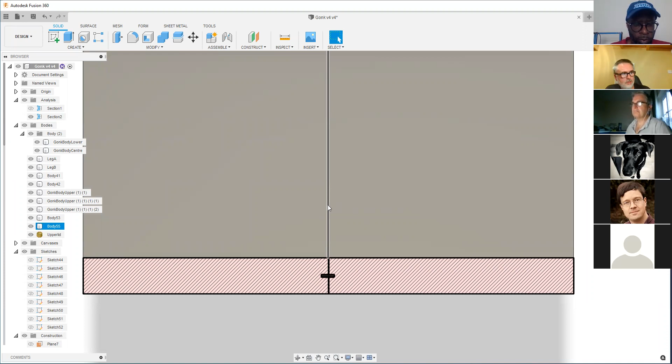Brilliant. Well, I think hopefully we've covered enough, and hopefully that gets you started on modeling. In theory now you should be able to, as we set out, model a Gonk that you could then print in whatever scale you wanted to. Fingers crossed everybody feels confident enough to be able to do that.

Good job. But by chance, what's the actual height of the Gonk full size? I haven't looked it up. I don't know how many meters it is. Never looked it up. We could soon measure it for you off that one, I think, can't we?

So how high is Anthony Daniels? No, this is 1-to-1. Is this a 1-to-1 that you're doing here? No, but this I did for Sideshow. So what's the big full size one? Yeah, I don't know how tall he is. 5 foot something. I've got 1.75 meters.

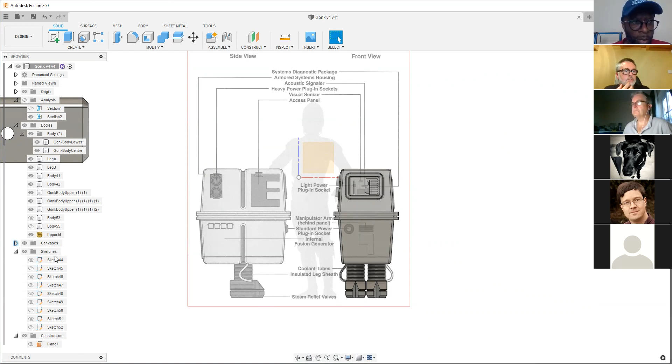So what I could do is go into Canvas and use Calibrate again. Assuming that height for Anthony Daniels is correct, that will be 1,750, which is 1.75. Do that. There we go. And then just double check his height. So I'm just going to draw a line, which is 1,750, and then I can draw a line for Gonk.

So it's just, it looks like it's just over a meter, 1.162. That's what I was thinking. Yeah, so what's that? 1 meter, 162 millimeters. Whatever that is in your strange American dialect of measuring things.

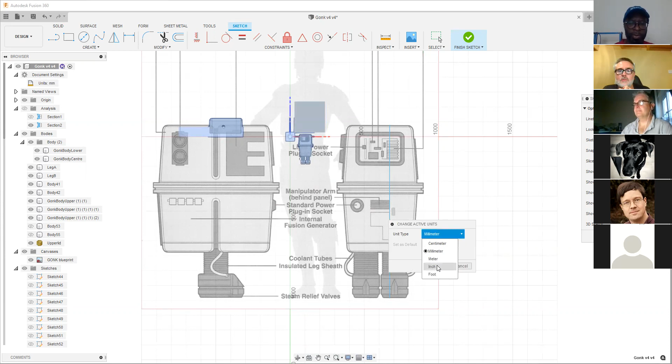Strange. Thank you, that's my next project. No, actually, if you've got document settings on there, you've got units, millimeters. You can change units at any time. So if I want to put that into foot, I can now measure that, and it's 3 foot. It looks like it's 3.8 feet high, the Gonk.

That's pretty big. Yeah, that is actually 3.8. But if you look at it, it is kind of coming to just below the chest of C3PO on that one. I actually joined a Gonk club, and they're using the plastic storage containers for it, and they got some pretty big ones, and they're very detailed.

We've modeled the Gonk for a smaller one, but you wouldn't necessarily print full size one because you could just use a plastic container one. Yeah, but they generally don't move around. That's what's kind of cool with the one I'm working on.

I don't know if you joined the Drinks and Droids thing last night, but we had Michael on who's doing all the sound effects. I think he's due to release a Gonk version of it. I'm kind of stoked about that because that's what I'm working on the mini right now. It's like, okay, can I just steal all those files? He's doing some amazing work on that, certainly on the Astromech stuff, but bringing that out to Gonks and some of the other droids would be fantastic.

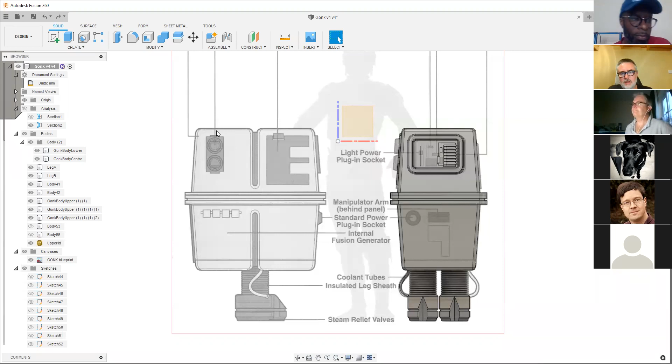I'll probably do a couple of weeks gap, and then what I may do then is do something that's more mechanical, so start doing some gears and some wheels and bearings. Yeah, because I just think this gets you the basics, but then what I'll do is start getting, you know, like the little baby astromechs that we did, maybe something like that, where we're bringing in some real life servos and then work out how we model it so that we can start getting things moving. So we can take some of the greebles off the R2 head and put them on. Yes, exactly, that's yeah, to help it easier to finish.